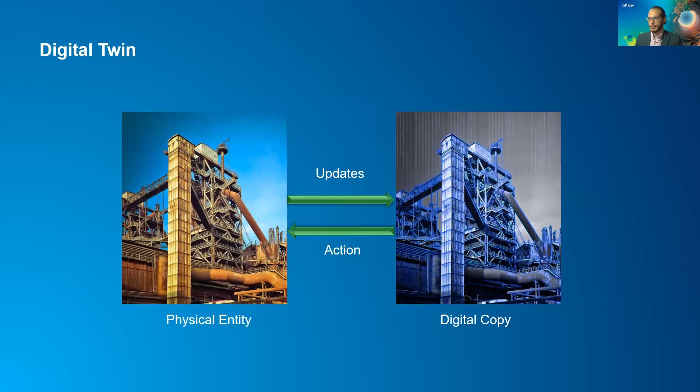To achieve that, we have some technology enablers, two foundation technologies we are talking about. The first one is GIS, or Geographic Information System, that helps us in answering the question of where - where is the best location for whatever I need to build, whatever sector we are working in. The GIS helps in the project life cycle, in the planning phase, providing the context we are working in, the geographic context, the layout of the project.

Also, it helps in the operation phase to have an accurate location for the elements or facilities we manage. To increase the level of detail of the graphical representation and the non-graphical data, we need the assistance of BIM, or Building Information Modeling. BIM mostly focuses on the design phase and the build or construction phase. It has predefined elements including properties, which can be materials, time or cost.

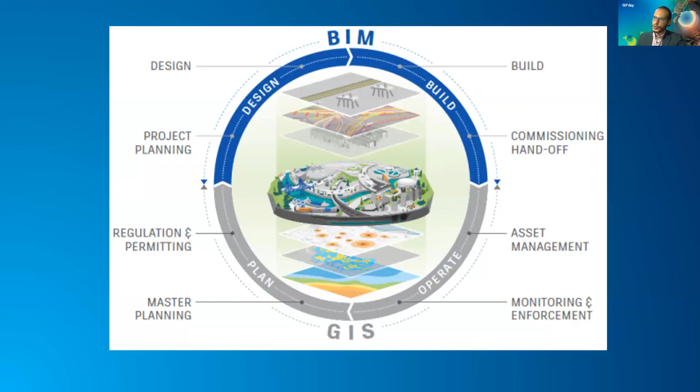The third party technology we need here for the city information management solution is IoT, or Internet of Things. It's a solution to make everything, every facility, every physical element in the real world, connected to the internet.

So if you go to work and forget to buy milk, your fridge will send you an SMS or a notification on your mobile: please buy milk, because your milk is about to be finished. So that is simply what IoT can do.

It has sensors that can get information of a certain type - like a sensor for the amount of milk in the fridge, a sensor for heat, a sensor for crowd, a sensor for pollution, a sensor for fire, a sensor for wind speed. Whatever the feed you are collecting, you have to connect with this sensor through the internet or intranet, whatever network we are using, to get real-time information about what is happening with the physical element in the real world.

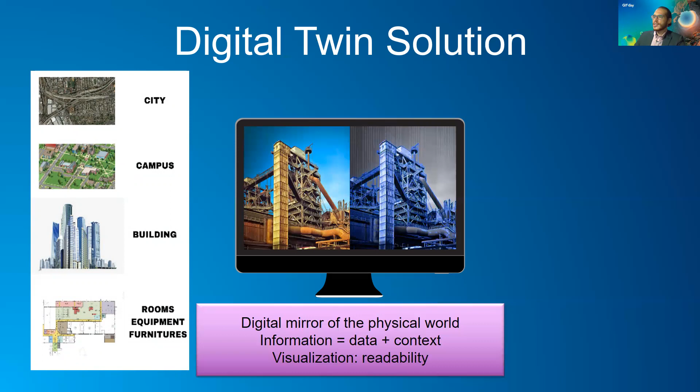So we need data and updates, and of course the faster the updates are, the more efficient the solution gets.

So the facility management is about taking, of course, the traditional inspections and also taking an action fast. An incident happens, you need to do your analysis to decide what is the best action to solve the problem. Then finally, you export a report for what happened, whether it's solved or not, to make it like a damage control.

So this process can be very effective if it was rapid and the analysis and the action was fast, and of course it will be faster if you can have accurate information in the fastest way.

So you need the IoT sensors, you need the mobile devices, you need all the ways to get information without the traditional way of getting to the site and then getting to the office to think and do your analysis to take an action. You need a more connected way to solve the problem in a fast way, even if you are in another country and the problem is far away.

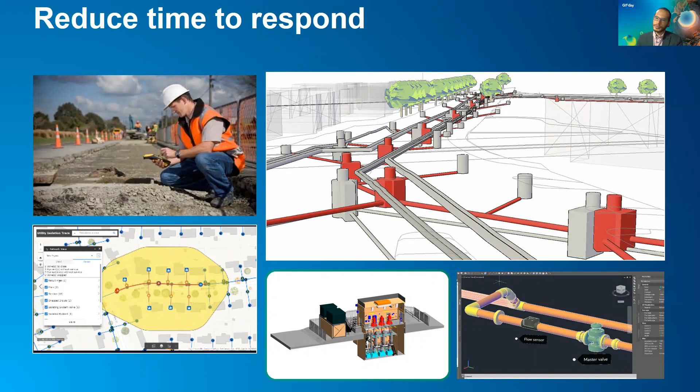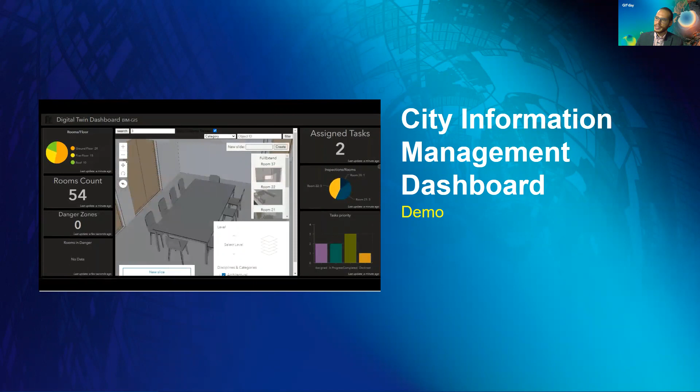Here is an example, a city information management dashboard developed in-house. Here we have the BIM and GIS context. We have the GIS base map, and on top of it, a building. Of course, if the city is larger, it has multiple buildings—this just shows how we can use the BIM-GIS integration for city information management.

So we have the building, the BIM model as it is in the BIM environment. We can do whatever manipulation we need. We can show some levels, some types of elements, some disciplines, some elements that are part of a certain discipline. We have full access to the information of all the data.

As we see here, we can click on whatever element on the model. It's also connected to a task or workforce management application. You can assign some tasks for the field worker, and he will get a notification on his mobile.

Of course, we have here a dashboard including the building data, and of course also the workforce data, because we were talking about facility management process.

Here is the view that the field worker can see from his mobile device. He will receive a notification that he has an inspection task. He will have a digital form to do his inspection, and whenever he finishes and clicks finish, you will receive an update. So here the task is reduced to 2 instead of 3.

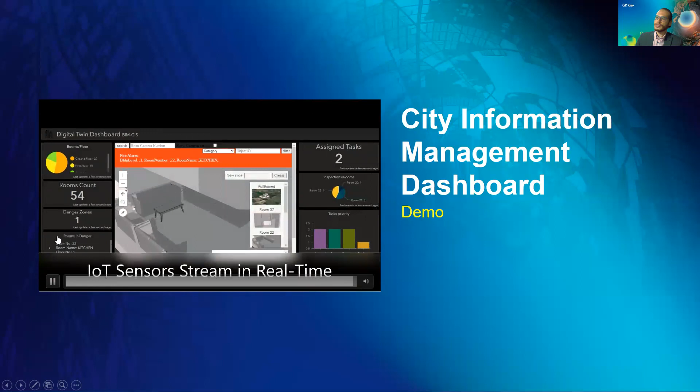And here in the last part we have the IoT sensors streaming in real time that reflects in our dashboard. Here is a fire alarm in a certain room.

Here is a full example for how the digital twin can be effective using the GIS BIM integration with IoT sensors and mobile devices to achieve the digital twin for city information management.

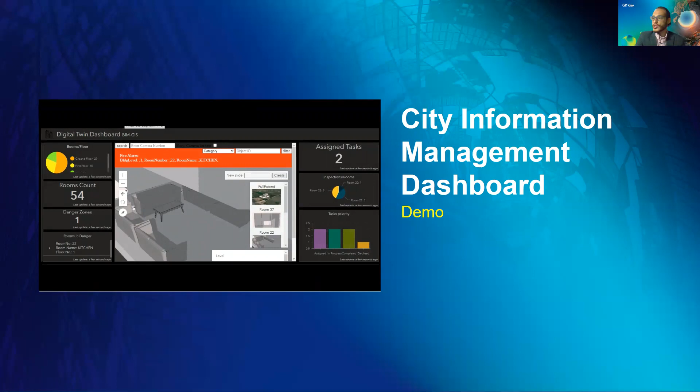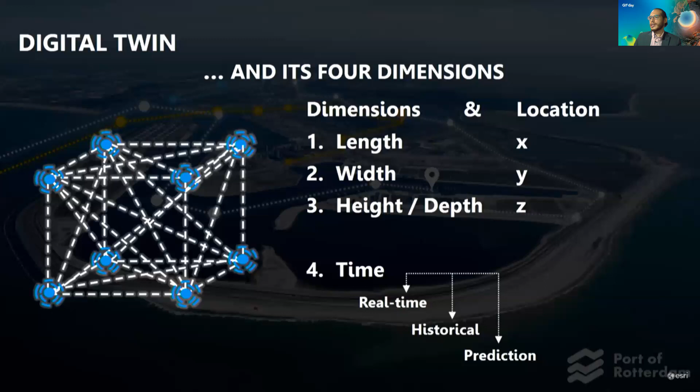Now we will get deeper about how we can build our city information model to be ready for city information management. Here's a case study about...

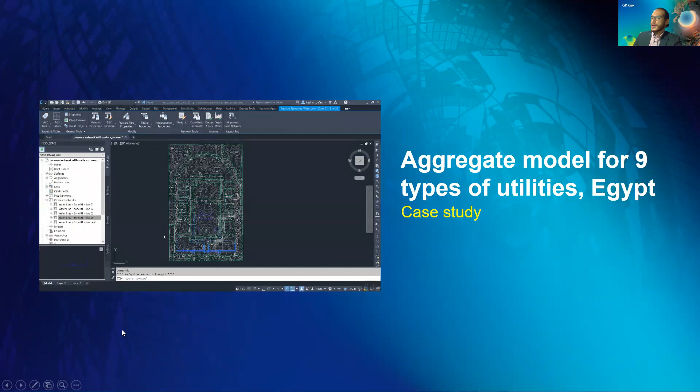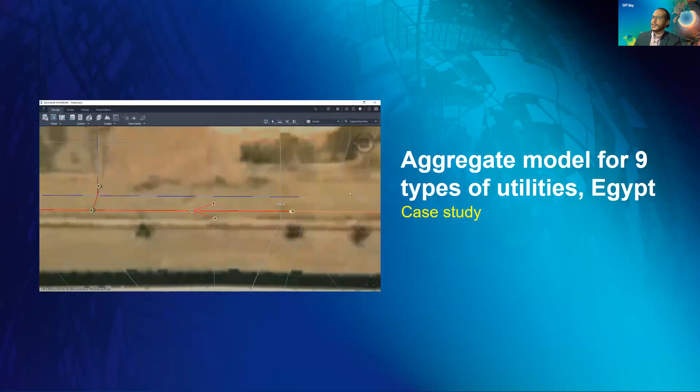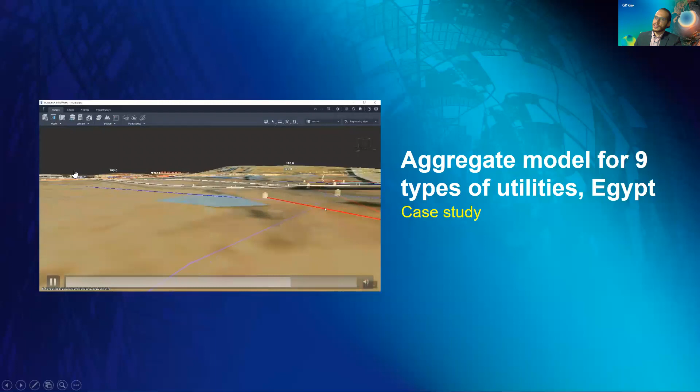creating an aggregate model for 9 types of utilities in Egypt, in a new area in Egypt. It has wet utilities like water and sewer. It has a firefighting network and 5 types of electrical networks. So it has all of these types of networks in just one place, utilizing the power of location in GIS and the power of engineering in the BIM. We have a high level of detail in the model, and of course it is ready to add any types of buildings on the surface as we see here, and it helps us make the coordination and clash detection before we move to the next phase of construction.

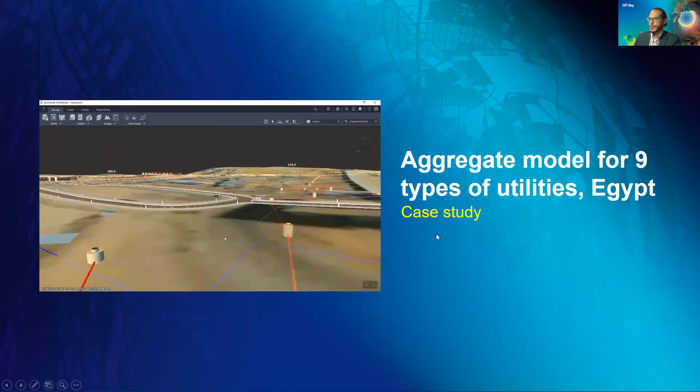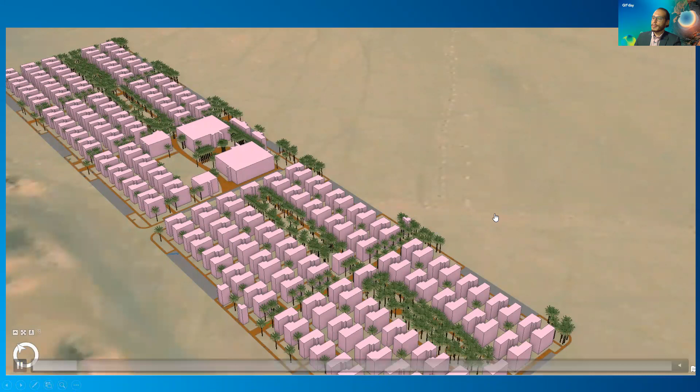Here's another way to develop a city information model for management purposes. If we don't need to go indoor or have a high level of detail, we can use the 3D GIS capabilities. Here we have a demo for a certain area in Neom City that contains footprints extruded to their height, and of course landscape data and all the data we need. This can be used if we don't need the high level of detail that we can provide using the BIM-GIS integration.

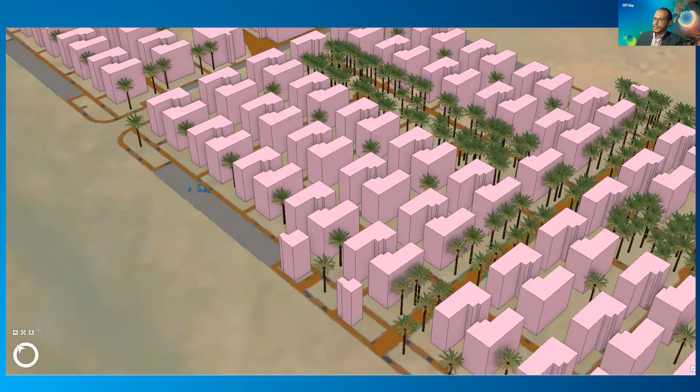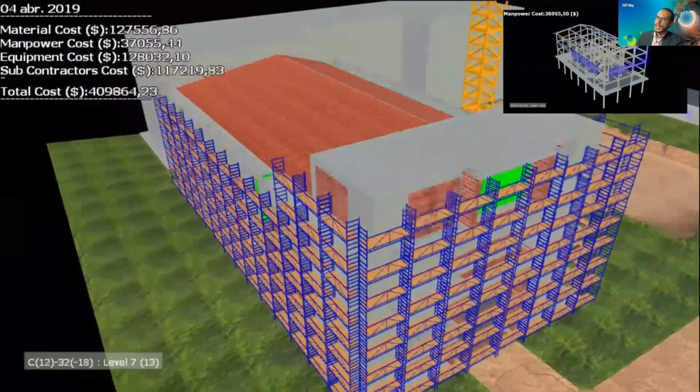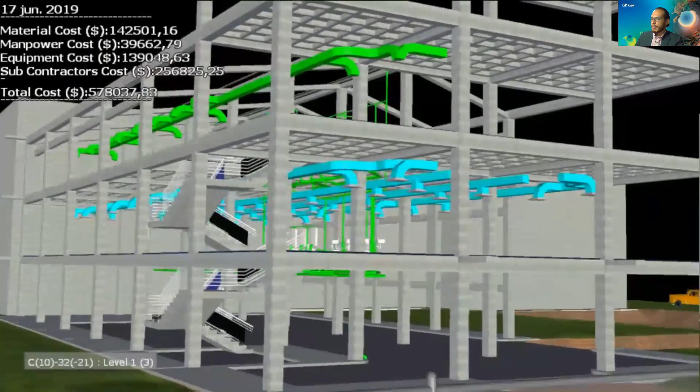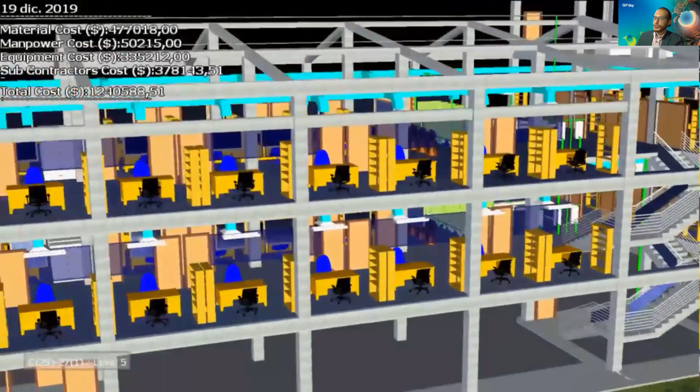Here is another way to utilize the solution. We can make a 4D and 5D simulation, linking the model with time and project management data like time and cost, and we can see here that the time and the cost are increasing according to the date of the simulation. So we have one model that contains all types of disciplines - mechanical, plumbing, architecture, structure - in one place to make a simulation for the real building, and it is intelligent enough to detect potential clashes, and we can solve them before we go to the next phase. And of course, it can help us provide an as-built model ready for facility management.

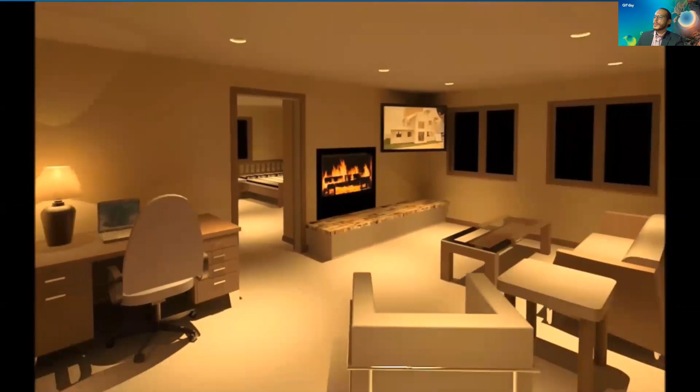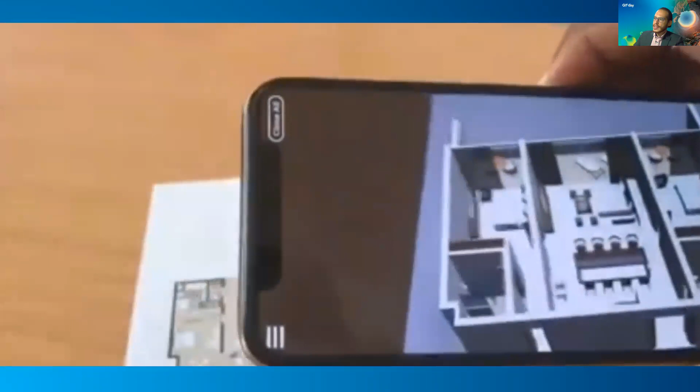Of course, we've all heard about the metaverse and Facebook, a new thing. We can use VR, virtual reality, and augmented reality. Virtual reality is about going on a virtual tour inside the building, or outside the building, whatever. It's a fully graphically generated environment to take an experience before implementation, or even if you want some insights and you're far away from the project. Also, we can utilize AR for creating digital maquettes, or even defining the place of underground utilities without needing excavation.

And of course, using spatial intelligence in pre-construction studies to have soil indicators about unsampled areas. We can create soil profiles with just one click. If you've worked with geotechnical data, you know this step usually takes a long time. Just by one click, you can create a 3D soil profile, and of course you can get indicators about floods, streamlines, and places that can collect water in case of raining or floods.

So our solution is about combining spatial intelligence and building information modeling to have all of these types of data in one place: the infrastructure, the buildings, the landscape, and utilize real-time data acquisition using mobile devices or IoT sensors. And of course, linking the data with security cameras, and of course the workforce and your inspections, because you'll go into facility management scenarios.